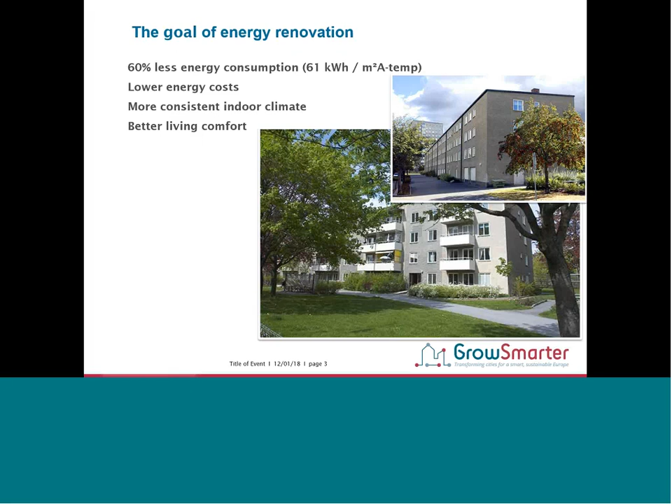These are the energy efficient measures being implemented: additional insulation on the climate shell, with an average U value improving from 1.0 to 0.5; an extra 80 millimeters of additional insulation on the exterior walls, with the U value on the exterior walls about 0.3 after the insulation, from an original 0.8.

200 millimeters extra insulation on the basement walls, 400 millimeters extra insulation on the roofs, and new windows with a U value of 0.7, from an original 1.8.

An efficient exhaust air heat pump is installed to produce heat and hot water for the building, and a waste water heat exchange system is installed to recover the warm water from the drain by preheating cold water to get warm water.

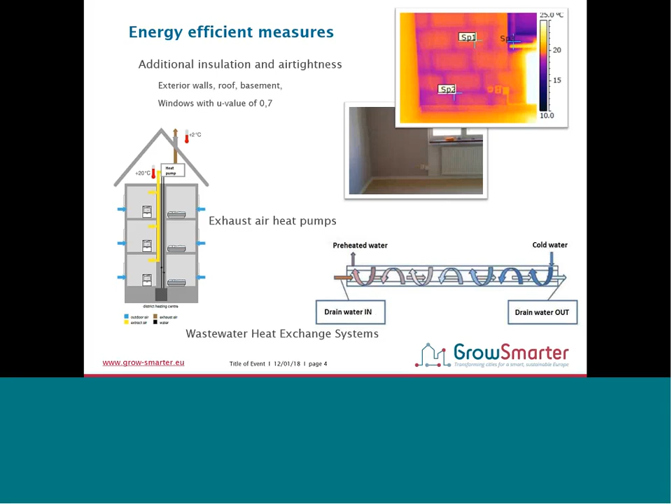We are installing a system to reduce the hot water circulation losses by having fewer hot water circulation pipes, extra insulation on the pipes we already have, and a system called the Smart Loop system.

We are doing adjustments of the heating and ventilation system to get a consistent temperature in all apartments, and not having excess warmth in public spaces. And of course, we are installing water efficient fixtures that will save cold and hot water when washing and showering.

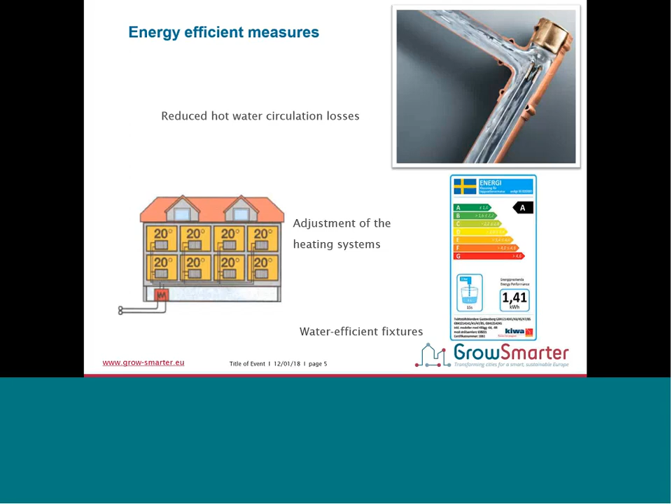We are installing energy efficient lighting, elevators, fans, and so on.

A new indoor climate control is installed to keep the correct temperature in the right place continuously. An adaptive control system is installed, meaning a number of temperature sensors are installed in the apartments to control the indoor temperature to the correct level. This reduces oscillations in the indoor temperature, which also saves energy.

This is the building's energy flow. The former exhaust air system is kept, but instead of bringing in fresh outside air as before over the window, the outside air is taken in behind the radiator to preheat the air when it's cold outside.

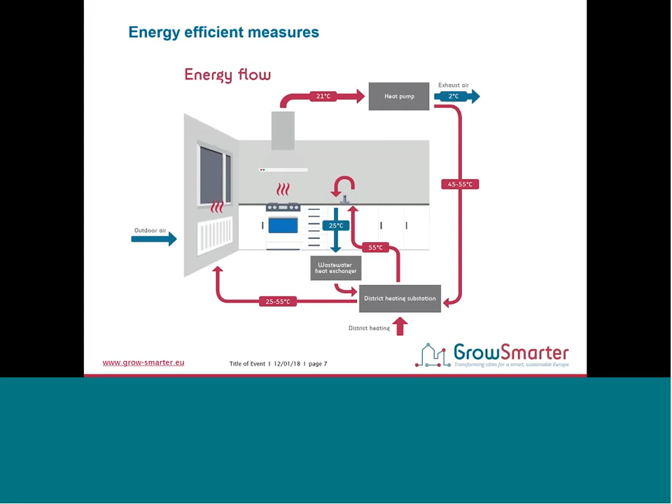The home energy management system is called Active House, delivered by Fortum, who is an industrial partner. In short, it's about informing and showing the tenants' energy consumption. The screen installed in the apartments allows the tenants to influence their energy consumption by controlling the temperature and lighting in the apartment.

An energy saving center is delivered and managed by L&T, who is an industrial partner in the GrowSmarter project. Basically, it's a system to monitor the energy performance and control the building's energy systems, such as heating, ventilation, electricity, and so on. The energy saving center is manned 24/7.

This is the current time plan. As you can see, work is ongoing in several houses at the same time. There are 6 houses total. One house is finished and all tenants have moved back. Another house is partly finished and some tenants are moving back. So this is an ongoing process.

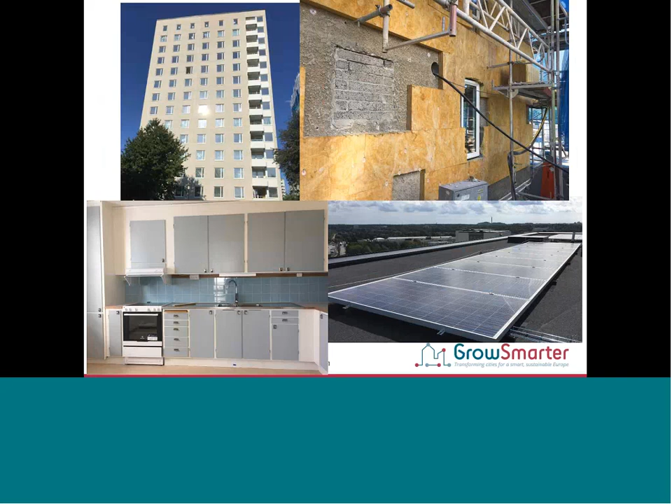That was my presentation. Thank you for listening.

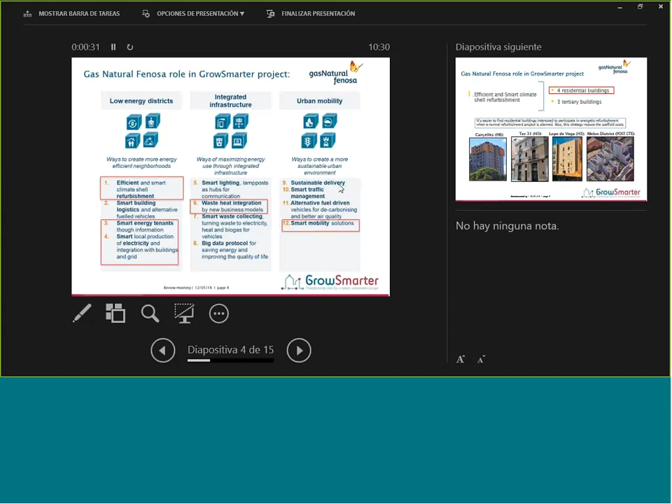Perfect. Okay, as I said, we will see these points, and we will start with the introduction. A short introduction of what Gas Natural is doing in the GrowSmarter project. The measures of the GrowSmarter project are divided into 3 high blocks and 12 measures. Gas Natural is working on 5 of these 12 measures, and today we are going to talk about the first one. In this first measure, Gas Natural is working on residential buildings and tertiary buildings. In the residential buildings, there are 4 buildings that Gas Natural is working on, making an energetic refurbishment. These 4 buildings are the ones we can see in this slide: Canyelles, Ter, Lope, and Melon District.

Well, first of all, before talking about each of these buildings, we will introduce a lesson learned here. What we learned when we selected the buildings was that it was easier to find a neighborhood or building interested in participating in an energetic refurbishment project when there was already a normal, structural refurbishment project planned for the buildings. This is for two big reasons. The first is that an energetic refurbishment means a high investment for the tenants, so they are a little scared about that. The other point is that with this collaboration, it's possible to reduce some cost of the refurbishment.

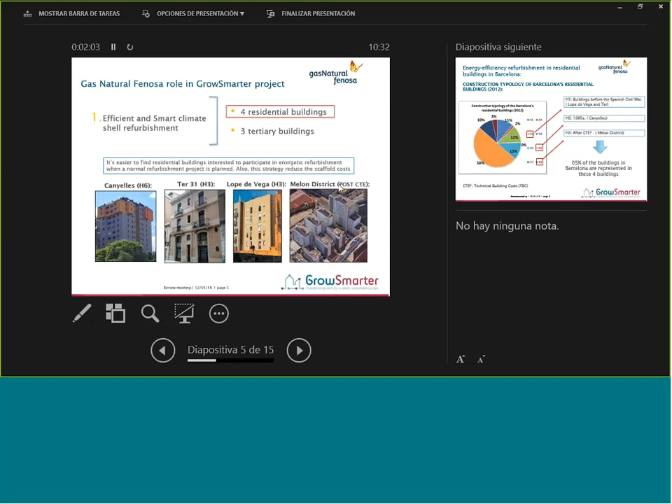Well, why did we select these buildings? The first objective, the first idea of Gas Natural when we thought about this measure, was to select buildings so that at the end the conclusions drawn from the measure could be easily extrapolated to the other buildings of Barcelona.

The constructive typology in Barcelona is easily divided into 8 construction types, which you can see in the chart on the slide. These 8 constructive typologies are divided by the year of construction of the buildings. For example, H3 are buildings constructed in the 30s. In this type we can find Lope de Vega and Ter. Also, in H6, there is the constructive typology H6, which are the Canyelles buildings constructed in the 60s. Finally, Melon District is the last building that Gas Natural has carried out works on; it's a building constructed after the CTE, the technical code.

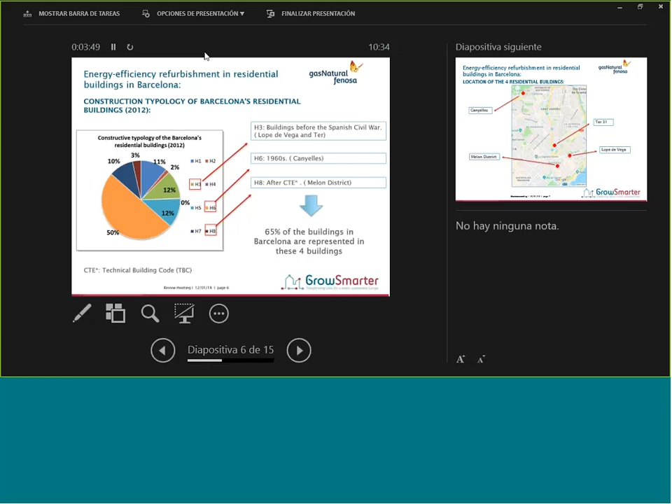With the selection of these 4 buildings, we are able to represent 65% of the buildings in Barcelona. So it means that at the end of the project, our idea is that the conclusions we get from this project can be extrapolated to the rest of the city.

Well, here is the location of each building. At the beginning, our idea was that all the buildings would be in the same neighborhood. In the end, it was not possible, so we were able to select 3 buildings in the same neighborhood, and Canyelles, which is a little farther from the other ones.

Okay, the first building is Canyelles. This is a big building. It has 57 dwellings, and here Gas Natural has carried out the refurbishment, which is now finished.

Passive and active measures were implemented. The passive measures are the improvement of the facade and roof insulation, and the substitution of old windows with new ones with a low U value, plus installing shading elements. For the active measures, we substituted some boilers and installed water efficient taps. Also, in some of the dwellings, we installed the home energy management system that Gas Natural developed in another measure of the GrowSmarter project.

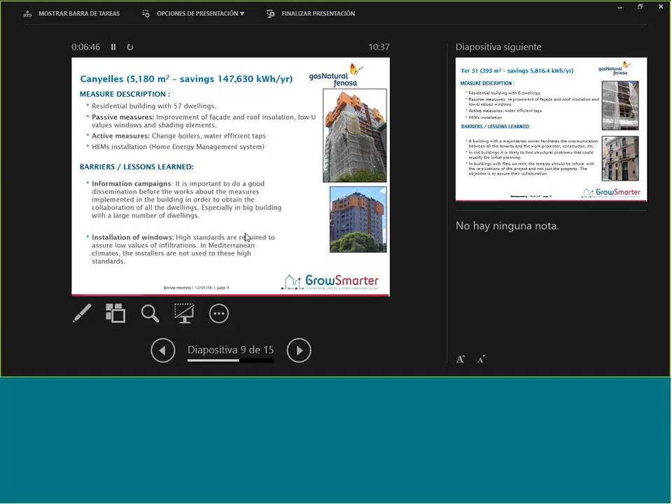The other lesson learned in Canyelles is that for the GrowSmarter project there are a lot of high standards we have to assume. One of these standards is the air infiltration that we can accept in a house, and this affects drastically how we can install the new windows. What we've seen is that installers in Spain, or in Barcelona in this case, are not used to these high standards, so we had a lot of problems ensuring them. This is because we are different from other countries in Europe; we are not accustomed to these high standards.

The second building is Ter, a smaller building with only 6 dwellings. We implemented passive and active measures here. The passive measures are the same as Canyelles: improvement of the facade and roof insulation, and substitution of windows. The active measures are the installation of water efficient taps and the installation of a HEMS.

What we've learned here is that in buildings that are a little old, like Ter, which was built in the 30s, it's more likely to find structural problems or issues in the building that can affect the rehabilitation planning. So when you start this project, you have to be conscious that it's likely to find problems in the building.

Also, what we've learned here is that when a building has a majoritarian owner, communication with the tenants is easier because you only have one interlocutor or speaker. This is important in Spain because, unlike other countries, people typically don't rent the apartment, they buy it. That's normally the case in Canyelles, for example, where you have 57 dwellings, each with their own opinion, and you have to try to talk with everybody.

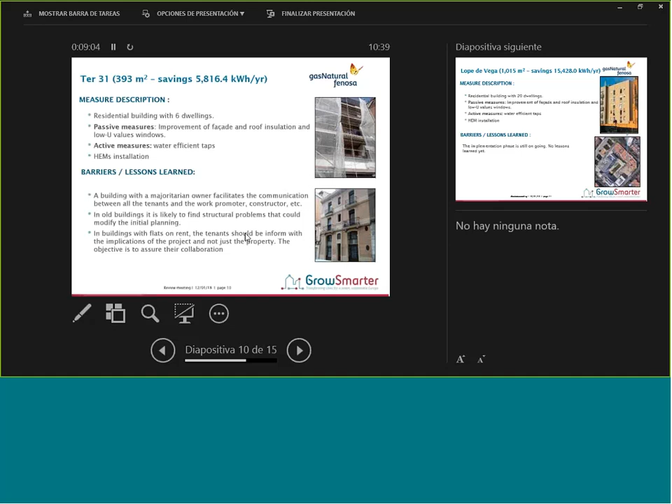And Lope de Vega. Lope de Vega is a building very similar to Ter. It was built in '32, but it's a little bigger, with 20 dwellings. The passive and active measures being implemented here are the same. We still don't have a lot of barriers and lessons learned for Lope de Vega because it's not finished yet; this is planned. The planning is to finish the measures by the end of February, more or less.

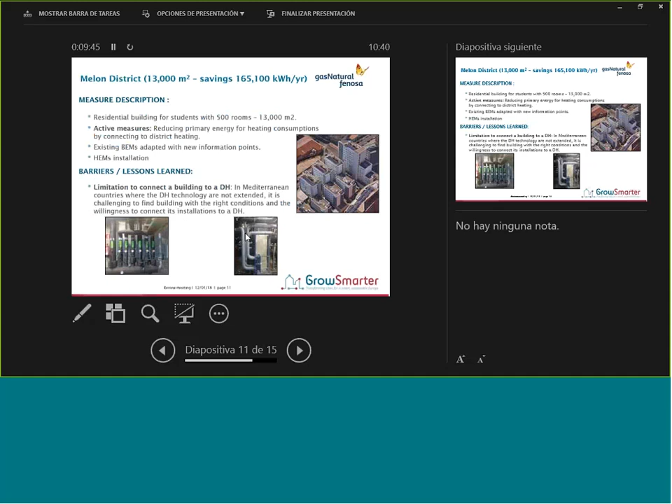And finally, the last building is Melon District. This is a high building for students, a residential. The measures carried out here are only active measures: the connection to a district heating system. Also, we've installed a BEMS here, and we've improved this BEMS.

The barriers and lessons learned here are that in countries like Spain, where district heating technology is not very extended, it's a little difficult sometimes to find buildings that want to participate in a project like that. This is for two reasons: the first is that there isn't a lot of district heating like in Denmark, for example, and also because a lot of people don't know the advantages and benefits this technology can give, so they're sometimes a little scared to participate in projects like that.

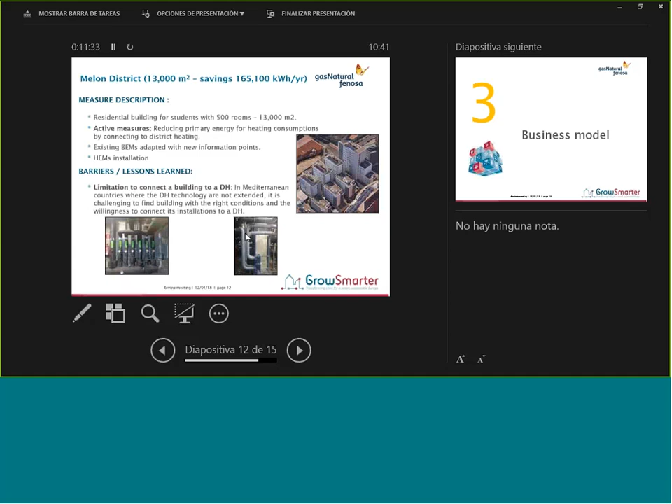The lesson learned here is similar to Canyelles: it's important to do an information campaign to inform people of the advantages and benefits of participating in projects like that, and not only focus on the technical project, but also focus on transmitting these advantages to the properties and the buildings.

First of all we have to say that Gas Natural will work in this rehabilitation refurbishment as an ESCO. So from the point of view of the neighbors and communities, we guarantee quality of works and energy savings. As an ESCO model, we have this in the contract, and also for the investors, we reduce the initial investment because the initial investment is made by the ESCO. And we guarantee the quality of the works.

For the cost, what we expect is a fixed cost and variable cost. For the fixed cost, there is project development, construction, commissioning, and salaries. For the variable cost, there is marketing, incidentals and delays that are easy to find in works like that, and an energy cost if it's supplied and it's in the contract.

For revenue, what we expect is the energy supply if it's included in the contract, because an ESCO contract could be or could not be included. Payments from the customer will be the fees that the customer pays to the ESCO for the initial investment, and also we expect some revenue from advertising on the scaffolding.

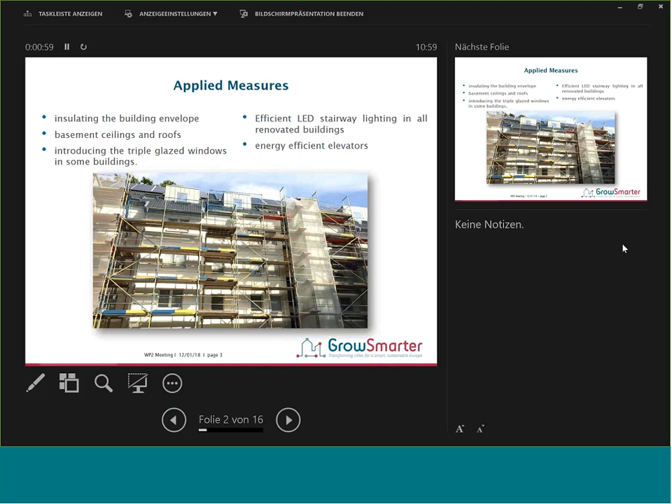We are the energy supplier here in Cologne. Also Mr. André Esser is sitting here, he is from the building company DEWOG. We'll give you a short overview of the low energy district in Cologne. Starting the agenda, first we talk about the applied measures, second we talk about the barriers or challenges that we had, and then an overview of our business model and evaluation strategy.

Starting directly with the applied measures: DEWOG is insulating the buildings' envelope, basement, ceilings and roofs, as well as introducing triple glass windows in some buildings, not all. The stairway lighting in all renovated buildings is replaced with efficient LED lighting, and energy efficient elevators are installed in the buildings. The elevators are very energy efficient and produce energy when they go down.

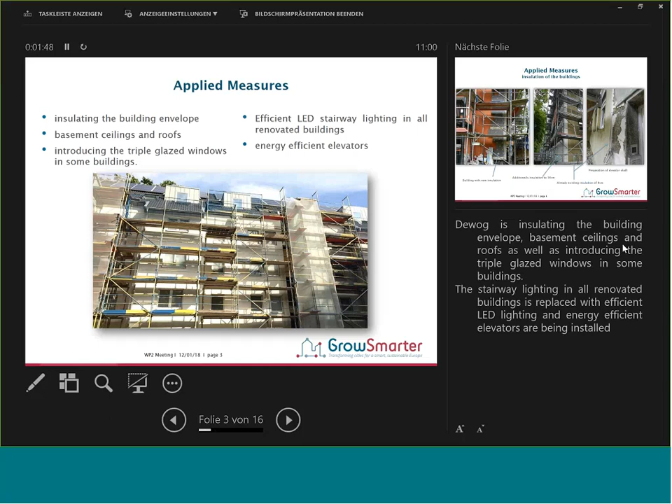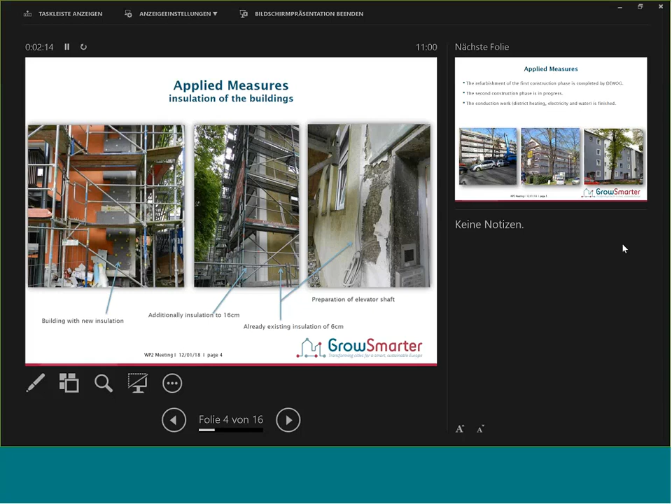Here we see some pictures of the insulation of the buildings. We go up to 16 centimeters. On the left picture you see the new insulation, and on the right one the old insulation, which we replace with the new one.

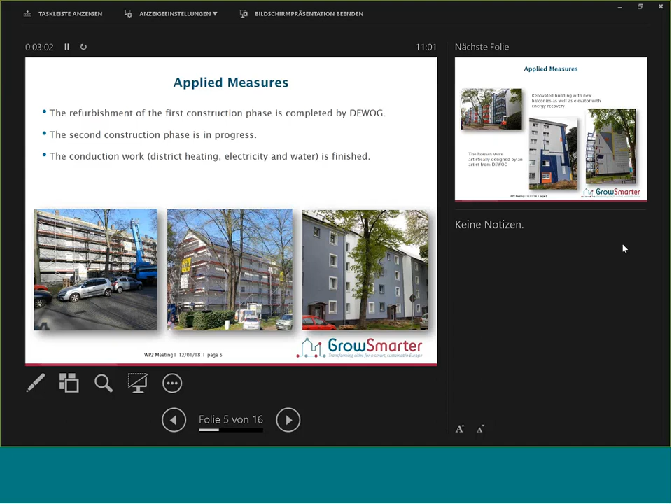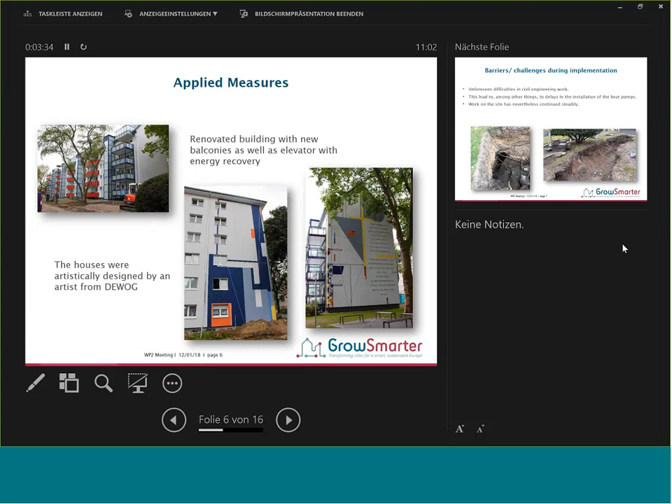Also, DEWOG has its own designer and designs the houses. You see this in the pictures - on the left is a new one, you can see the elevators installed, and on the right side are the final houses designed by DEWOG. The houses are very modern and very nice.

Not everything was easy - we had some barriers or challenges during implementation. The first construction phase was delayed due to unforeseen difficulties in civil engineering works. This led, among other things, to delays in the installation of the heat pumps. During excavation of the foundations, reinforced concrete and vaulted masonry were found on the site. After demolition of these obstacles, cavities left by debris, like machine cellars, occurred and had to be filled, but the work on this site nevertheless continued steadily.

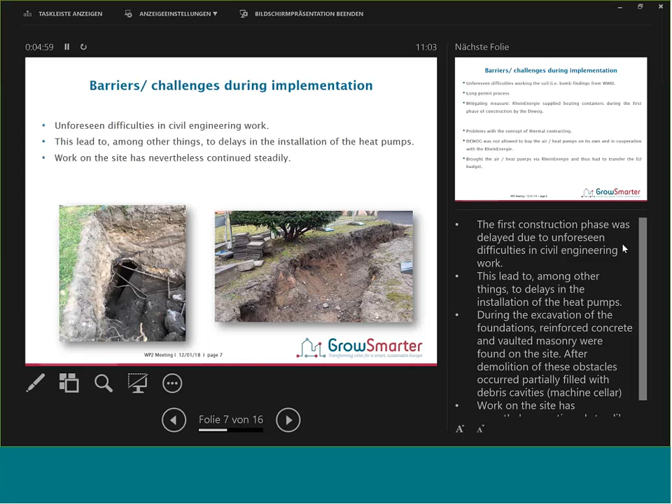You see in the pictures on the left side, we found an old machine room after 30 centimeters, completely full of stuff, and that was a big barrier or challenge for us, because on these foundations we could not build new objects like heat pumps or something else.

Also, the construction of the district heating was delayed through a longer permit process, as well as due to unforeseen difficulties working the soil - for example, we found some bombs from World War II in the ground. As a way of mitigation, we supplied heating containers during the first phase of construction, in the winter of 2016 to 17. We had some problems, so the construction of the heating system was late, and with the heating containers everybody in the settlement had warm water and heating.

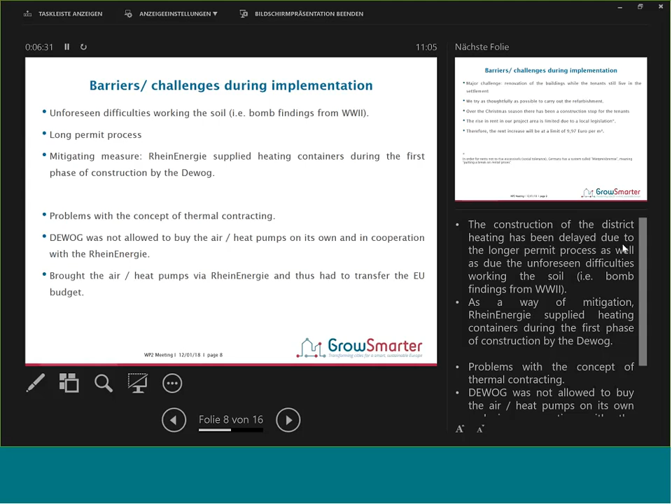We also had problems with the concept of thermal contracting. The problem was that DEWOG was not allowed to buy the air heat pumps on its own. In cooperation with RheinEnergie, this had some civil law problems, so we transferred the air heat pumps to RheinEnergie along with the budget from the European Union. Now the heat pumps belong to RheinEnergie, not DEWOG.

Another major challenge is the renovation of the existing buildings while the tenants still live in the settlement. That's the big challenge in this project. We try to carry out the refurbishment as softly as possible. Over the Christmas season, there has also been a construction stop for the tenants.

The rise in rent in our project area is limited by local legislation to keep the rent and social structure in this settlement stable. This is of course a challenge to the business case, but it gives a strong social dimension to Smart City and GrowSmarter in Cologne. The rent increase will be limited to a maximum of €9.97 per square meter for these new apartments.